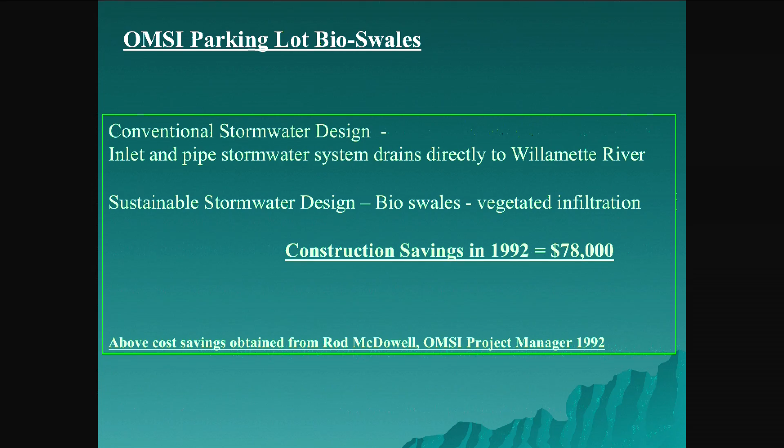So what they did have, though, is that they already had all of their construction costs detailed for the project in the conventional design. So when they switched to this design, they did have to pay more for design work to switch the design, but after it was all said and done, and the project was constructed, and this is in 1992 when it was finished, the construction dollars that OMSI realized from that detailed accounting was $78,000 cheaper than the conventional design. This, to me, is a very subtle, interesting issue here.

If the conventional design is actually more expensive than this design using a landscape approach, then how is it that all the conventional thinkers can say that water quality and stormwater management is going to cost us more money? The conventional design is actually costing more money. So there's a new way to design that's better than the conventional. At least this project suggests that, or even proves it.

Now, the other thing that happens in Portland is we do have a stormwater fee or utility, and so you get a discount. And so OMSI, from what they would normally pay for 9 acres of parking, would be $46,000 a year, what the city charges, and they get a discount of 35%. So they save $16,000 on this parking lot design annually, which is very helpful for taking care of the landscape. Now, they were always going to have a landscape because we require you to have landscaping if you're in the city of Portland and you're going to develop.

Now, the other thing about this that's pretty interesting is for a long time we thought this was an anomaly, that it was just this project that worked out this way. After this, as I'm working on many of these issues with stormwater, contractors, especially developers, are saying, these regulations are going to kill us. We're going to have to spend so much money for stormwater and everything else. I contend that the people that cause the most cost for stormwater management are the people who have the least skill in being able to design facilities.

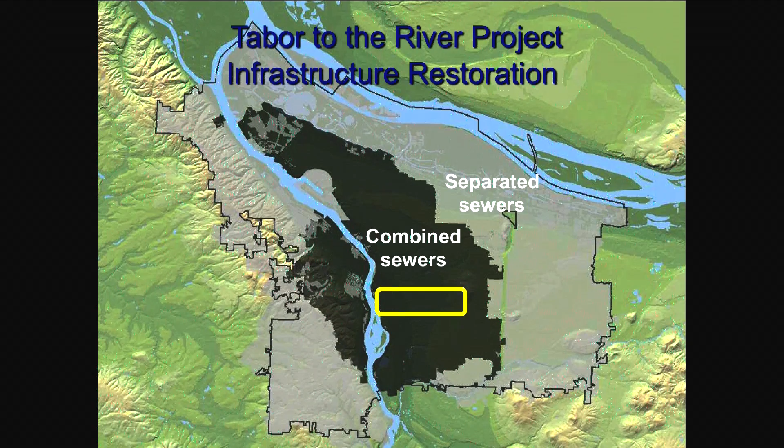Anyway, so then as years have gone by, now we have a combined sewer system. This is our city here. This is separated sewer. Anyway, we have this problem. Besides, in the Clean Water Act, we have all these issues of point source and sanitary sewage, things like that. And we also have a requirement that cities are not allowed to allow basements to flood from combined sewage. And if that's happening, we have to fix it. So we've got hundreds of millions of dollars worth of work to do.

So with this new development, now we're talking about retrofitting. And Philadelphia, I'm so proud of Philadelphia. I'm so happy about Philadelphia. Anyway, so this is about 2,000 acres of developed land. We've got to get the water off the system, which is what Tom's trying to do with his group.

And so this is what it looks like from a very aerial view. There's an old extinct volcano up here that's a park, and then it's residential, commercial coming down to here. So within this area, we need to get a lot of water off the system and prevent these basements from flooding.

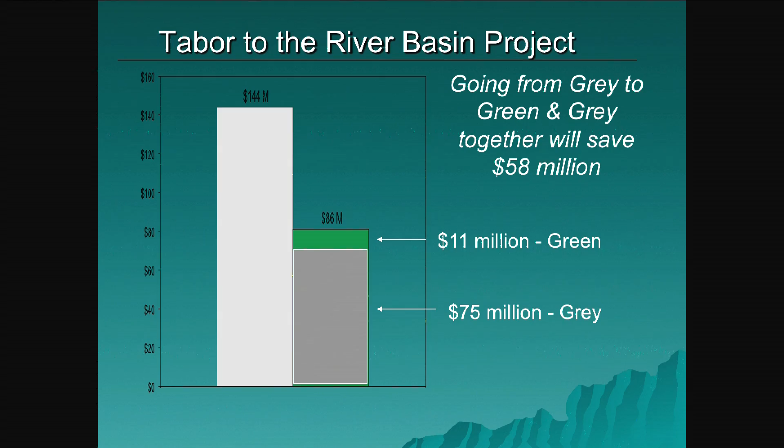So somewhere around the early 2000s, it was a gray design or conventional design for upgrading the pipes. It was $144 million, and that was too expensive to do, so it got put on the shelf. And then in 2006, the Bureau decided, well, let's rethink this, and let's apply green. So green streets, as you've seen, and various other retrofits, everything's retrofitting, right? So we have to do this, $144 million.

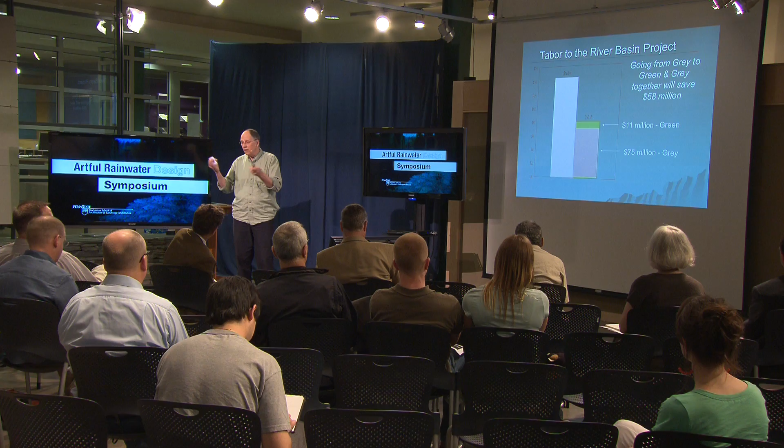They applied $11 million worth of green approaches, primarily parking lot retrofits and green streets. And then the engineering modelers redid the flows, and they found that this got enough water off that they only needed $75 million for the gray. So the bottom line is the Bureau was going to save $58 million by going green for retrofitting. And we have to do this. We could keep putting it off, but eventually we have to do it.

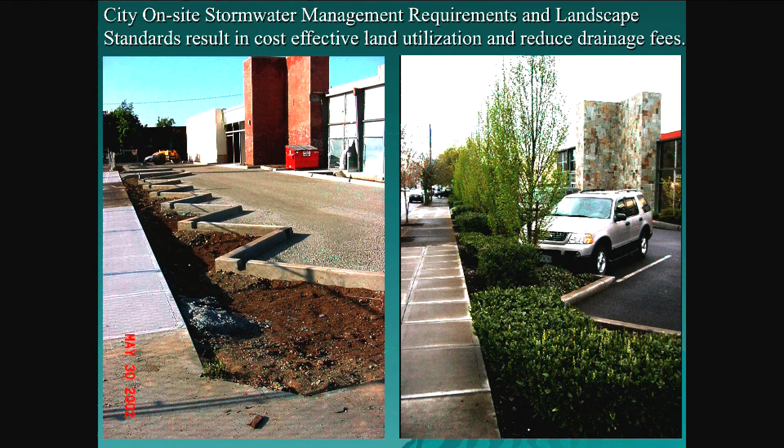And then this is more examples of this idea of putting water into the landscape. This is a redevelopment of an existing building, not new development. And I like this. Look at this repetition, it's so simple and so easy. They just said, well, we've got to have the landscape, that's how we're doing the landscape. And then they just put the curb cuts in, and that's where the water goes. And this is what it looks like a couple years later.

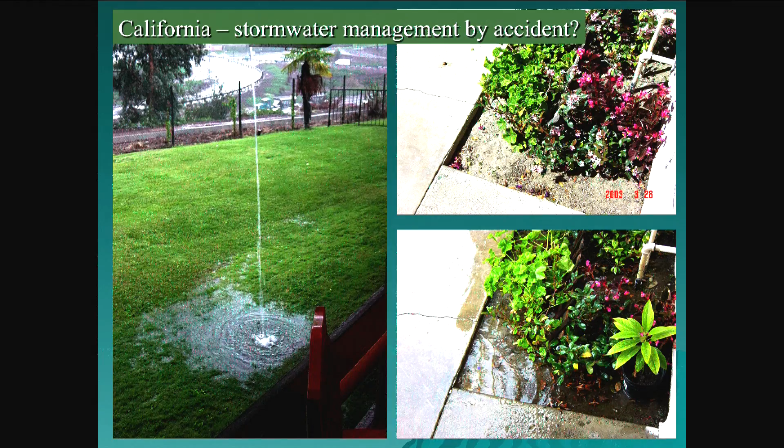This is Charlie Brown's restaurant in San Gabriel. If you ever go there and it's raining, this is how they manage their stormwater. This was my mom's condo, and when it rained that day, I finally found out that this little planter was where the downspout drained, and it just dropped right off the roof. So from big to small and everywhere in between.

Him from a civil engineer perspective, who was with the city of Malmo as a wastewater engineer, and myself as a landscape architect with another wastewater utility. So anyway, the intention of the book is to describe Malmo's transition from traditional drainage and buried pipes towards sustainable urban drainage in open systems. So when he heard me talking about the landscape and his idea of having open systems, it was very much in line with each other.

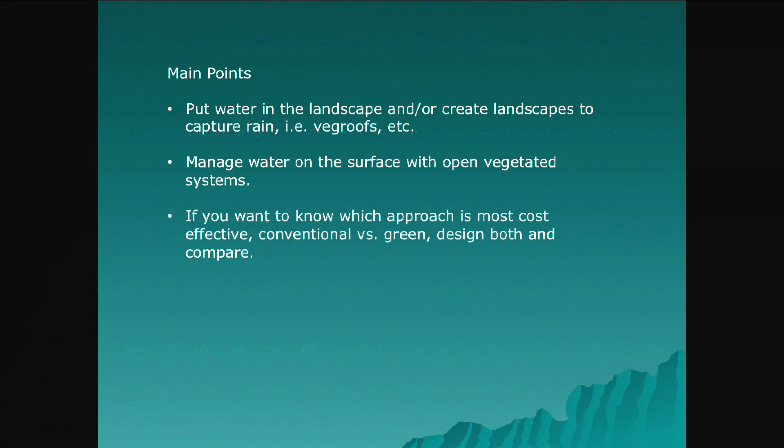So the main point, as it relates to saving money, is this idea that if you put the water in the landscape or actually create landscapes to capture the rain and everything else we've been talking about, that's one of the methods of saving money on development. And manage water on the surface in vegetated systems. And if you want to know which approach is most cost effective, first design it in a traditional way, and then redesign it green, or design it green and then design it conventional.

Now, who has money or time to do that? Or who has a client that wants you to do that, right? So it's only been by accident that we came across some of this information, and then I've looked at it as the years have gone by to actually take projects. And I have some more in here. This is my main point, but I want to now show you some other ones.

I was going to tell you a story about my garage eco-roof and the yellow tulip, but I'm not going to tell you that.

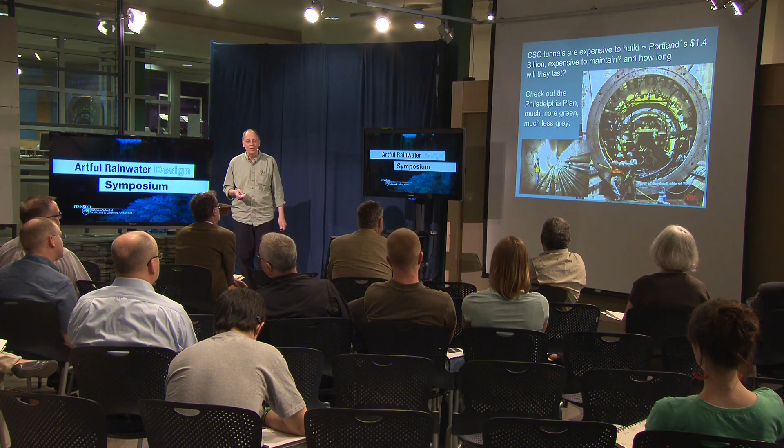But the engineer on the project did not want to do this, and he told the client that it should not be done. So we were in a meeting, myself, his other consultant, and the developer, and the consultant said, well, I don't want you to do this, and I don't want to do it. So the developer said, well, okay, I guess I'll hire somebody else. So that was the end of the meeting, and about a week later I heard that it was being designed and that consultant was still on the job. So hopefully he learned, and I hope he's been doing more of these since then.

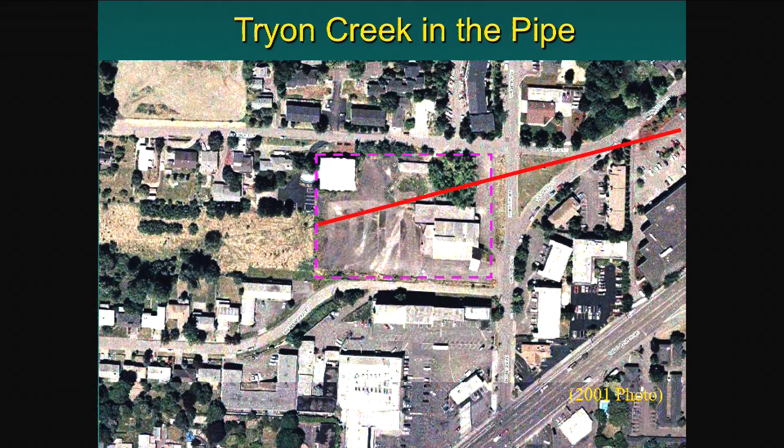And then just real quick, I know I ran out of time, but this is the Headwaters project. It was in a pipe, so somebody talked about a project in a pipe. Who was that? Yeah, Warren. And so it's a creek daylighting. And see this street right here? This is going to be important. So that little thing, and then here's this traffic island.

So have you ever thought about how our cities are designed, and how many streets do we have that we don't need? Ever thought about that? Or if you're in some new cities and you're designing cities. So what happens on this is that here's the new creek alignment. This is where the creek actually used to be. And you notice the road is not there? Oops, went too fast. So we put the creek where the road was.

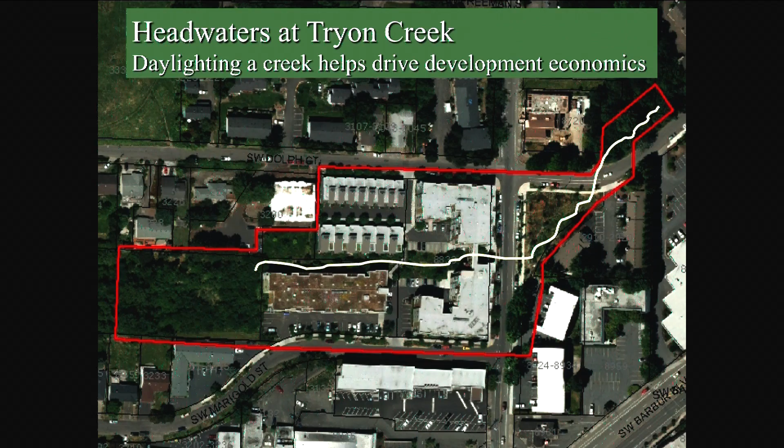And how did we do that? I have to say, I'm sort of a guy that's always saying why. My mom used to say, Tom, stop, enough. Or why did we do that? Or what's that for? And so I asked the question because we needed room for this creek. And I thought, well, this stupid street's in the way. And then I was looking at it, I thought, oh, it's not even safe. It's uncomfortable, it's not safe. So of course, I'm a landscape architect, not a traffic engineer.

So the transportation department said, well, we think you're right, Tom. But you guys at Environmental Services, you have to do an analysis to prove that it really is. So we hired a traffic engineering consultant, and they confirmed that, yes, this would be a much safer, better intersection for everybody involved if this little side street did not exist. And so we took it out. Well, and then, of course, our department had to pay for that. The developer paid for daylighting this.

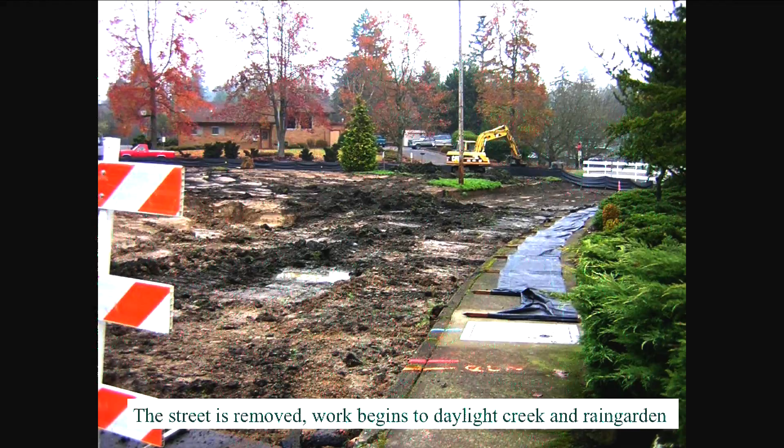And so you might think, well, why? Well, I'll show you a slide of what it looks like from above. So this is where the sidewalk is still there, but the street has been removed. That, to me, is like, we removed a street. We removed an unnecessary street, unnecessary impervious area. And that's kind of a thing. And there's a group in Portland called Depave, and their whole thing is to remove unnecessary impervious area. Anyway, so then this was converted to this.

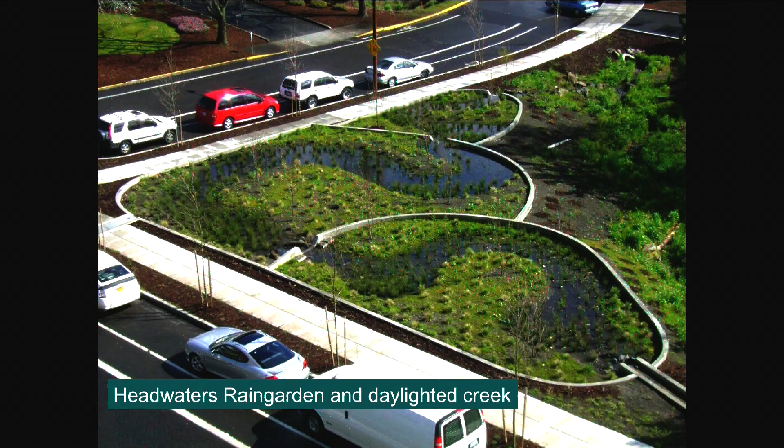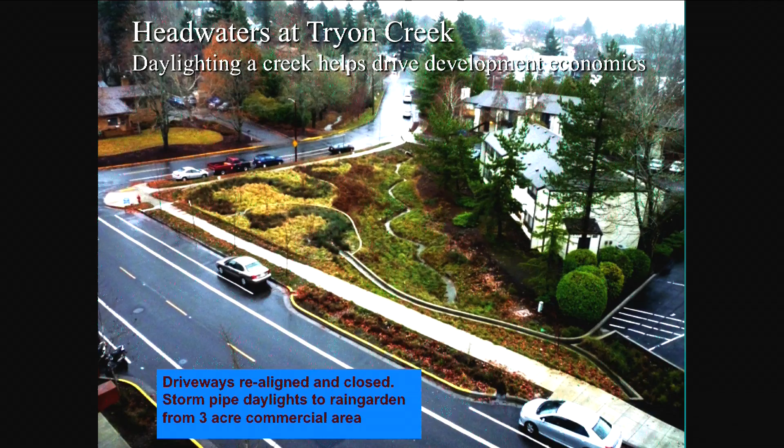So the creek is actually over here. This is a rain garden that we used for retrofit. It's a retrofit for the upland commercial area, which is not in the photo. And then this is what it looks like where the creek goes through here. And then there's that kind of flume that goes through. And Kevin worked on this a little bit, and there were a group of us, especially on the rain garden concept here. And then here, the street. So the creek goes through here.

So you can imagine, when the developer was proposing this, the original design had landscaping in between the buildings, but the creek was in a pipe. He was going to be required to rebuild the pipe and put in a new pipe that was a little bit bigger and better and all that kind of stuff. And then it was actually one of the planners that said, why don't you daylight the creek? And then we picked up on that and said, yes, why don't you daylight the creek? And he did. It was a lot of work, a lot of trouble, but he did it.

So prove it. And so it was my bright idea to say, why don't we use a fire hydrant? We can simulate a 25-year storm with a fire hydrant. And Tim, our engineer, he calculates exactly what the 25-year storm is, and then we set it on the meter. We paid $15,000 for a meter. A little expensive, but we do a lot of testing with this. Anyway, so it worked.

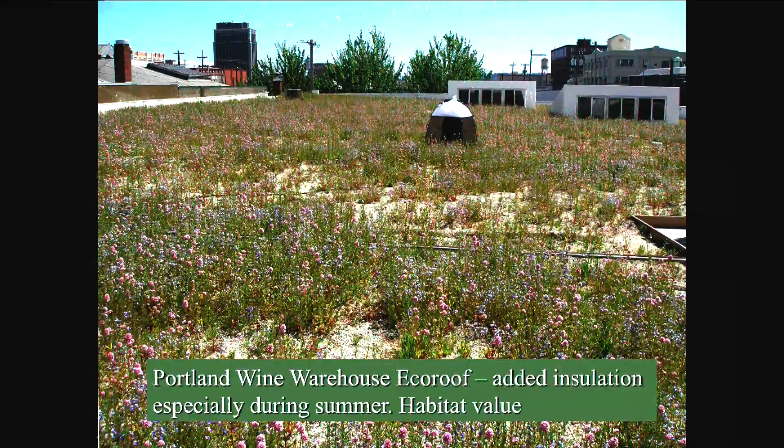Yeah. Anyway, so then eco-roofs, we haven't had a lot of talk about what I call eco-roofs or extensive green roofs, things like that. But this is the Ford company. Did they do it for smart business? This is a company that owns a building that stores wine. So they wanted to really heavily insulate their building. This is actually for studying bugs. It's a bug tent. So we're looking at habitat on vegetated roofs. So this owner of this building wanted to max it out. This is one of our first demonstration projects.

What was the difference? Different substrate, different plants, different design with the insulation, stuff like that. The point of this is that they both work, but there is a difference. All eco-roofs are not equal. So it's something that we'll be working on.

Well, I won't be doing it with the city. I'm having a little hard time. I only left 4 months ago, 3.5 months ago.

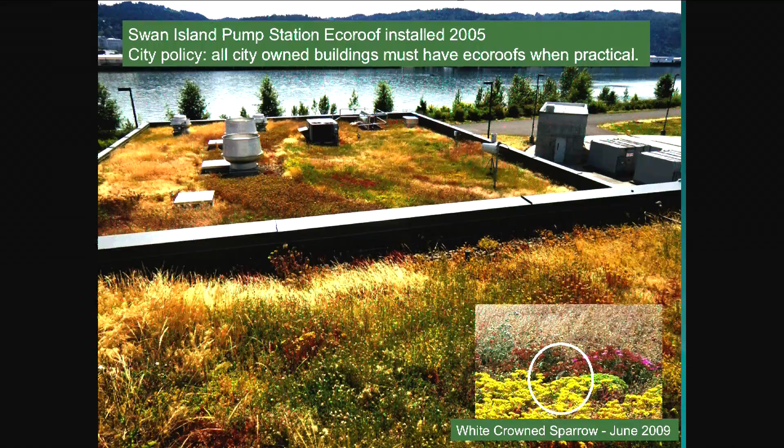Anyway, and then in Portland, and this is happening with a lot of developers, the city passed its own policy that requires the city to put eco-roofs on all city-owned buildings. I'm hoping to work on requiring it on all new development buildings, whoever owns them, because I just think it's time. I mean, they're affordable. The costs have come down dramatically in Portland from what they were, and it's just a good practice.

The biggest thing for some of the developers who are doing this as their first choice is that it protects the membrane, thus they've extended the life of their membrane, and after 20 years they start bringing in money, and they're the developers that are hanging on to their properties, especially cities and things like that. And I think I've gone over time. This is amenity value and also money, profit for developers.